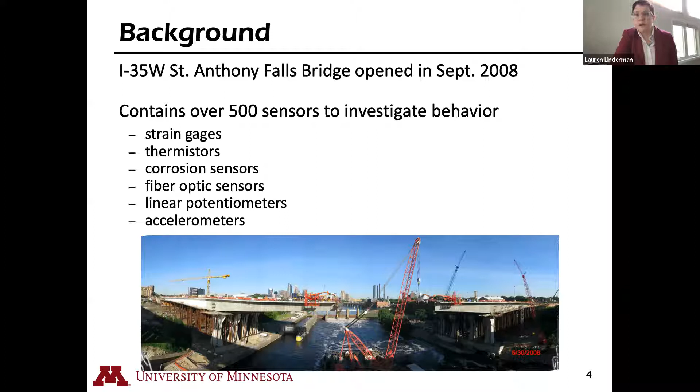The I-35W St. Anthony Falls Bridge opened in September 2008. As part of the bridge project, it was designated as a smart bridge, containing over 500 sensors used to investigate behavior, including strain gauges, temperature sensors, corrosion sensors, fiber optics for strain, linear potentiometers for evaluating displacements, and accelerometers. The goals of the instrumentation were to evaluate design assumptions, investigate structural characteristics and potential changes over time, as well as evaluate the effectiveness and appropriateness of the selected instrumentation.

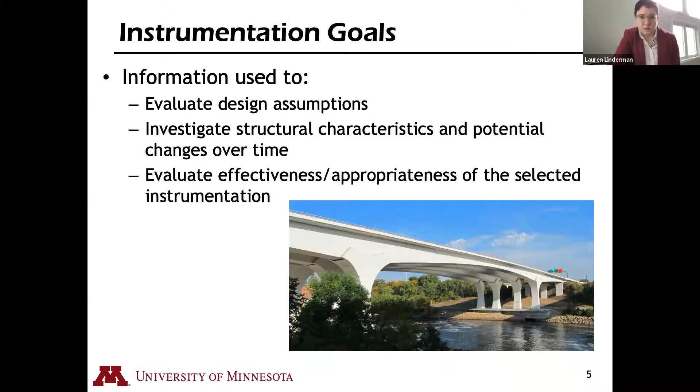A little bit about the bridge: there are actually two separate bridges, a northbound and a southbound, that are almost identical. Each has two boxes, with 3 continuous spans and an additional span. The continuous part is about 1,200 feet, with a 500 foot river span. They're post-tension concrete box girders, with each bridge consisting of 2 single cell boxes that are post-tensioned together to make up the section.

The main span was constructed using precast segments, while the other spans were constructed using cast-in-place on falsework. The cross-section is deeper towards the piers and gets narrower towards midspan. Most of what I'm going to discuss today is going to focus on the river span, and then also looking along the length over these first three spans.

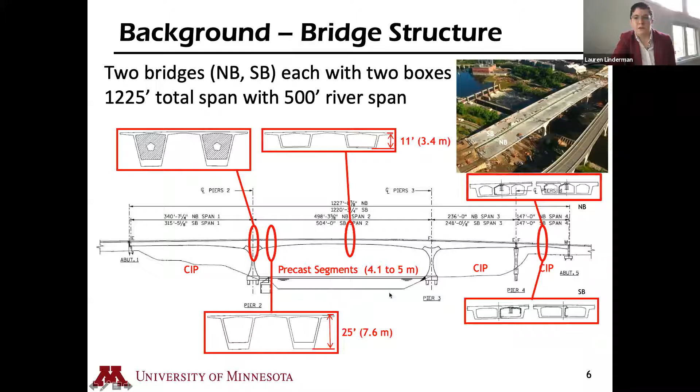There are additional thermistors at the midspan of the river span, and then fiber optic strain gauges placed along the length of the southbound structure. I'm going to discuss in a little more detail the vibrating wire strain gauges, the thermistors, the fiber optic sensors, and the LPs which measure displacement, because you'll see more information related to that data in the remainder of the talk.

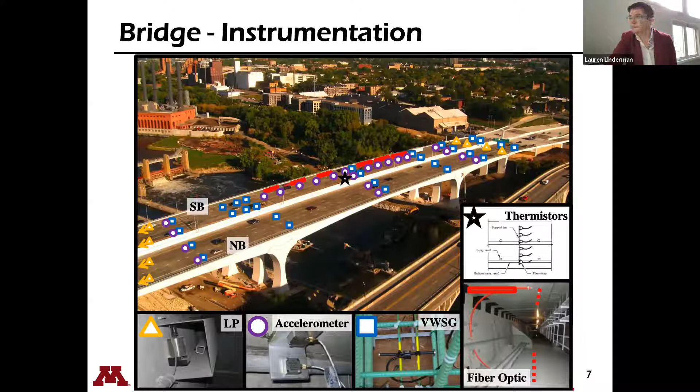There are 147 vibrating wire strain gauges used in the bridge superstructure: 112 in the southbound bridge and 35 in the northbound bridge. These are cast mostly within the concrete, approximately 6 inches long, and they measure local strain. They also include a thermistor, so they allow us to measure temperature as well. We use this sensor information to look at load distribution, shear and torsion, deformation, and curvature along the cross section. Typically these are placed through a cross section, so we can get a distribution of strain.

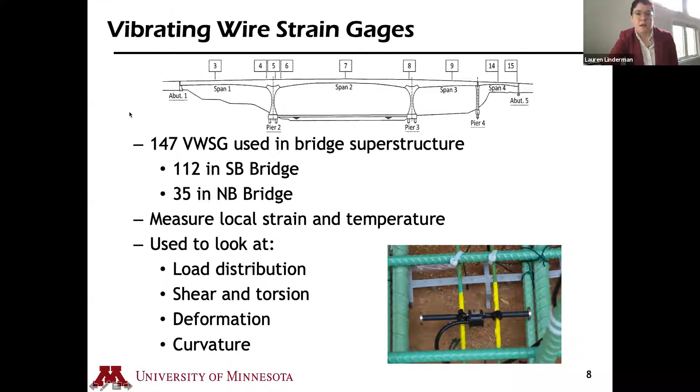What I've highlighted here are the key cross sections that are instrumented along the length of the bridge. In addition to the thermistors available in the vibrating wire strain gauges, there are 48 additional thermistors in the bridge superstructure, of which 42 are installed in the southbound bridge. These were used to supplement some of the data from the vibrating wire strain gauges.

Here I show one of the cross sections at mid-span of the southbound structure. There are vibrating wire strain gauges distributed along the depth, and then there's an additional set of thermistors, an array here, that are included to understand the distribution of temperature through the flange of the box. We used the additional temperature information to look at thermal gradients through the cross section.

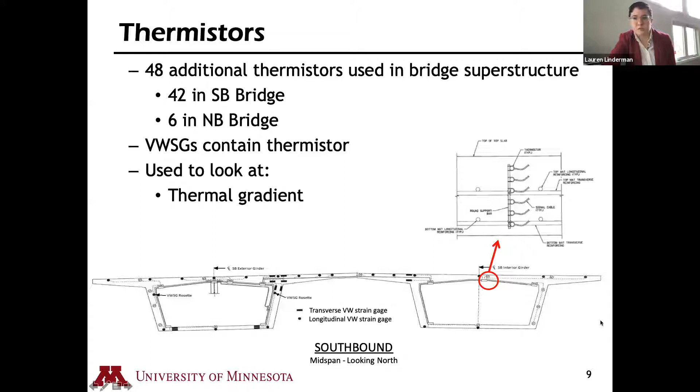Each box at the bridge expansion joints includes a linear potentiometer. This is used to measure the displacement of the expansion joint, or the overall longitudinal movement of the bridge. These are used for the majority of what we use for the long-term analysis to look at the overall global behavior of the structure.

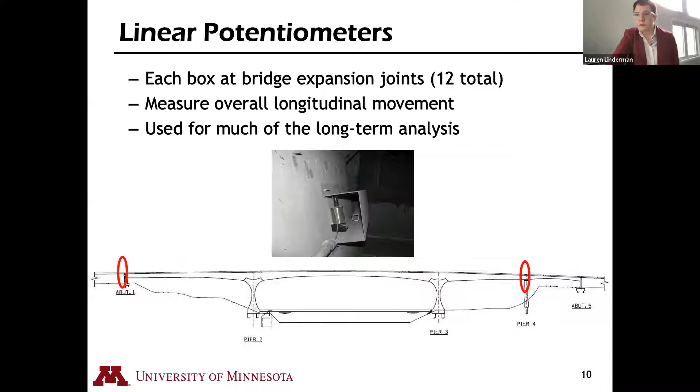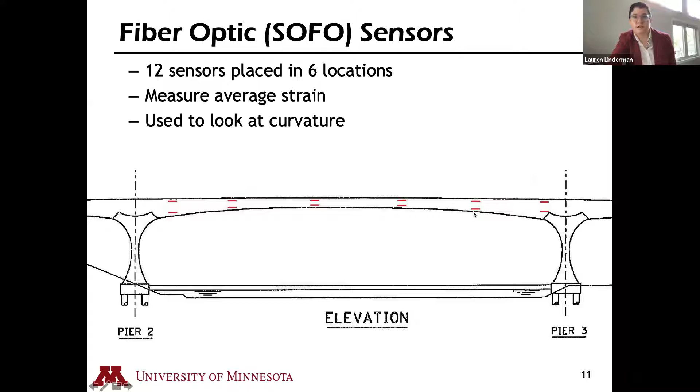And then finally, for the fiber optic sensors, these are strain gauges located in 6 sections of the river span. The sensors measure average strain, and they're about 13 feet long, so the strain is averaged over that distance, unlike the vibrating wire strain gauges that measure more local strain. So we have an average strain at the top and bottom of the cross section, and we use that to look at curvature.

Overall in the project, we found that the instrumentation survival rate is about 90%. This is significant given the duration, the number of sensors, and the embedment of a lot of these gauges. Some instrumentation performed better than others - we had to replace several of the linear potentiometers, and the corrosion sensing system never functioned. So that 90% is distributed on average, while some perform better than others.

The temperature sensing, the strain gauges, the linear potentiometers, and the accelerometers, as well as the SOFO systems, mainly were used to validate design assumptions, provide insight on the temperature and time-dependent behavior, and then also calibrate the FEM model that I'll discuss in a moment. Of particular interest, the temperature measurements and displacement measurements at the joints have been essential for long-term monitoring of the structure - these are the key measurements we've been building off of.

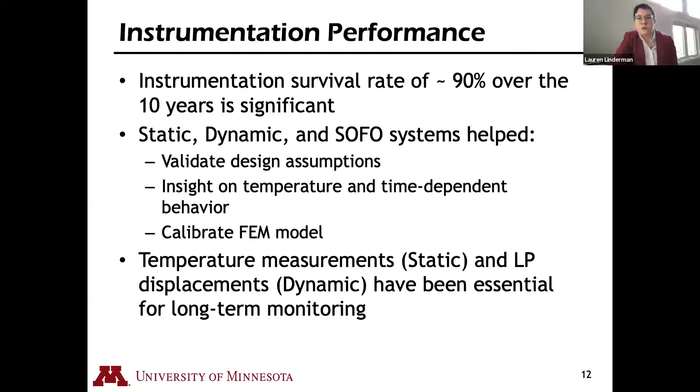So in general, with any monitoring system, the goal ideally would be to take our measurements and then be able to identify structural changes over time, to provide some insight of where to look or things that might be of concern. And that sounds pretty straightforward, but it's not.

So the idea is, how do I go from this really noisy data, or what we think is noise, to actually identifying what's changing with time? Data from individual sensors alone isn't going to be able to do that, because if I just had a sensor alone, then I just had this kind of bearing displacement data.

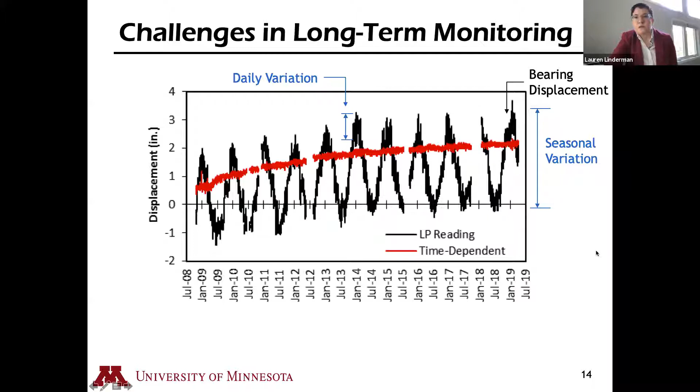Some of the challenges of doing this is that bridge behavior depends on a lot of complex phenomena. What we're trying to use is data from a group of sensors through a cross-section, particularly temperature in addition to mechanical measurements, in order to identify the actual baseline behavior that we're looking for.

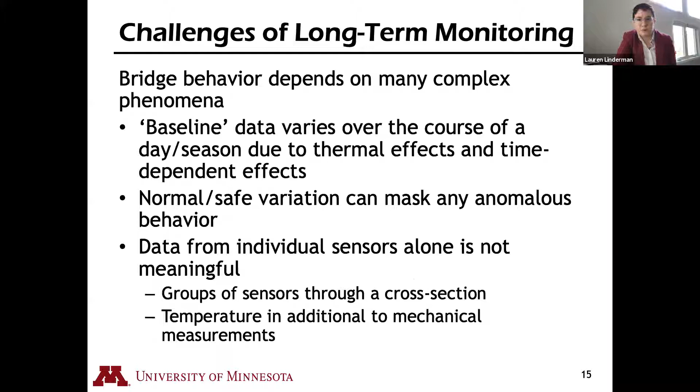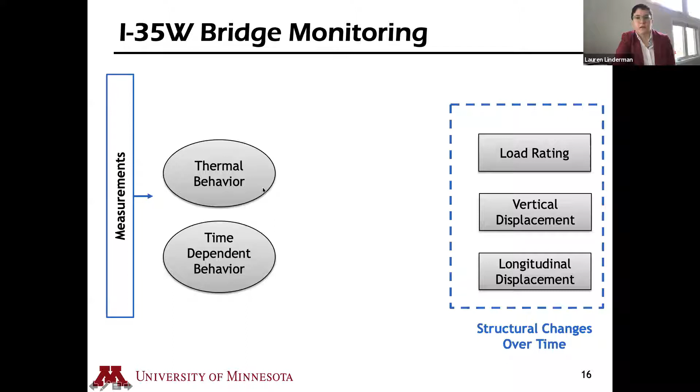So for this structure, we took the measurements and then looked at some of the key behaviors. We have both time-dependent behavior and thermal behavior that are going to be driving behavior of this structure, and combine that with an FEM model, which is informed by a dynamic model and some of our measurements, as well as information provided by truck tests, so that we can ultimately identify structural changes over time.

And what's interesting, or kind of nice too, is that these thermal behavior and time-dependent behavior analyses that we do help us evaluate some of the design assumptions that were used for constructing this bridge.

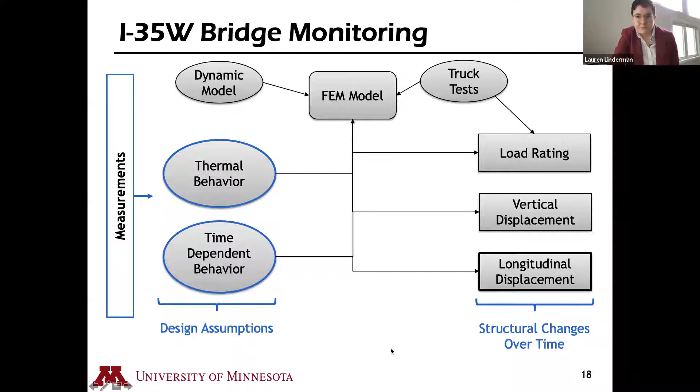So today I'm going to focus on the thermal behavior and the time-dependent behavior, and how that informs the longitudinal displacement. This uniquely large data set allows us to evaluate these design assumptions, and understanding these are essential to investigating structural characteristics and potential changes over time. This also allowed us to evaluate the effectiveness or appropriateness of the selected instrumentation.

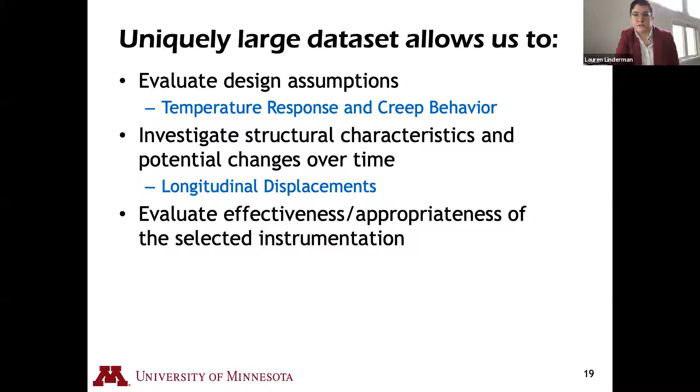So the first thing I'm going to touch on are the temperature response of the structure. And as you can imagine, in Minnesota, the temperature loading can be quite significant. So often when we think about temperature loading, what we're actually thinking about is thermal gradients - this is the temperature variation through the cross-section, and this is going to cause thermal stresses.

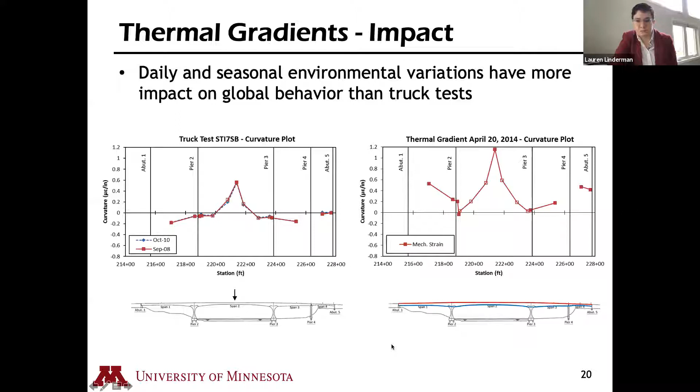So what we're going to look at is what are the shapes of these thermal gradients and how they compare to what we imagined for or proposed in design.

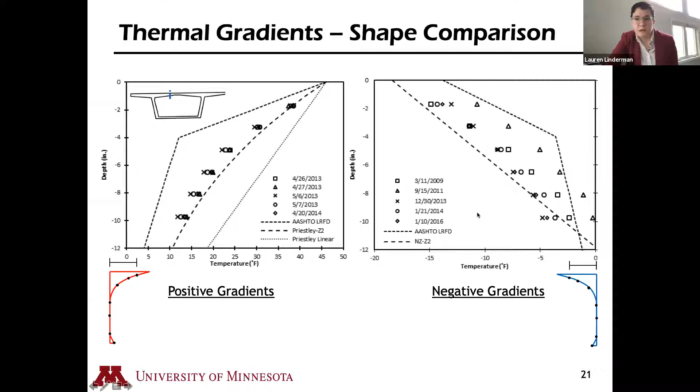So what you have here is the AASHTO design curve, these are the measured data points, and this dashed line is the Priestley New Zealand curve. On the right, you see the negative gradient profile. In both cases, the New Zealand curves, scaled to the region we're in, AASHTO Zone 2, better approximate the maximum measured thermal gradients than AASHTO. When we're worried about thermal gradients, we're interested in this area back here, and by aligning with it we get a larger thermal gradient magnitude. We see that in both the positive and negative gradients.

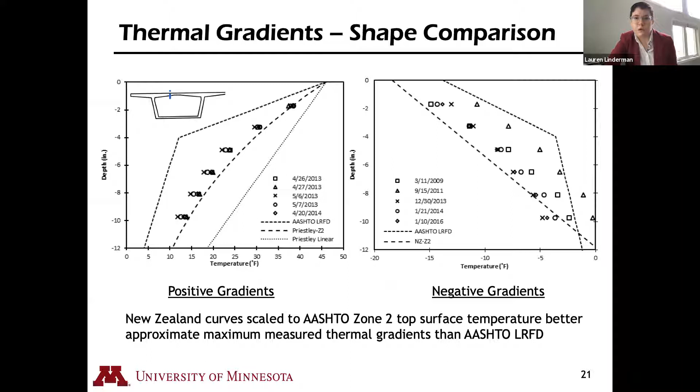So the gradients are larger, but what impact does that actually have? We looked at the induced stresses by applying these thermal gradients to the previously confirmed 2D finite element model to compare the effects of the thermal gradient. What you're seeing here are the stresses derived from that along the depth of the cross section, compared to the code. We found that the measured stresses were typically best matched on average by the Priestley New Zealand prediction, and this causes additional tensile stresses due to the gradient — about 80% larger at the bottom fiber due to the positive gradient, and for the top fiber, negative gradient, tensile stresses are about 30% larger. This could be significant for serviceability.

So what we're concerned about is if you have larger— sorry, distracted by the chat.

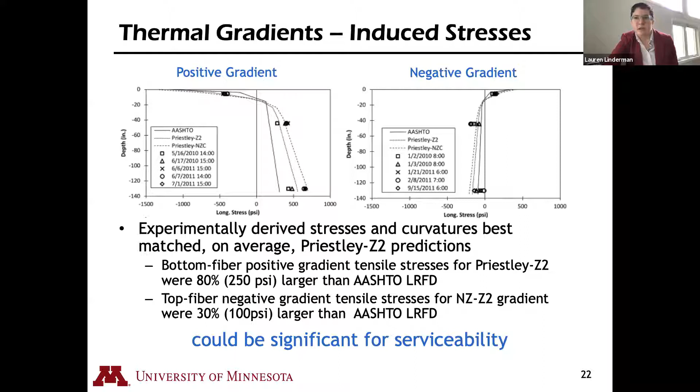If you have larger tensile stresses, you could get cracking or unanticipated cracking. So we see that it is possible that these large gradients could induce large stresses. But the question is, how often does this actually happen? I only showed 5 of the larger gradients — is this going to be a common occurrence?

So what we looked at were the measured positive gradient magnitudes compared to design gradient magnitudes. Here you see the measured gradients over time, and these two lines I've highlighted are the AASHTO LRFD magnitude and the Priestley New Zealand magnitude. What you'll notice, at least for the positive gradients, is that there's significant seasonal variation — larger positive gradients in the summer and smaller in the winter.

You see this when we look at just the number of days per month where we're exceeding the AASHTO design magnitude. We typically exceed the AASHTO LRFD design gradient on 33 days per year, so it's pretty consistent. And we only exceeded the Priestley design gradient 3 times over the 9-year period.

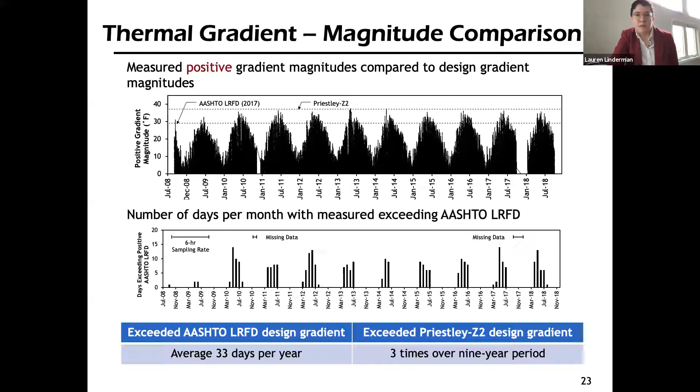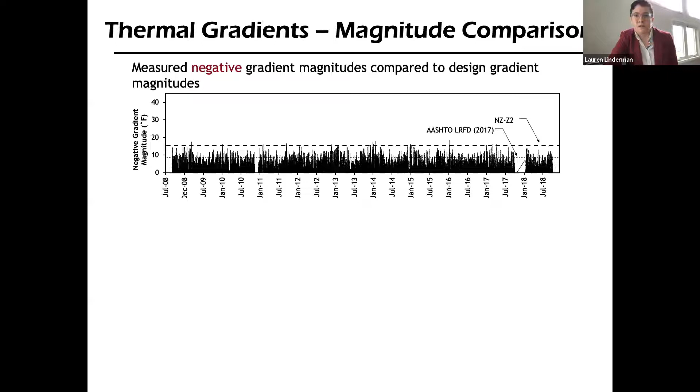We see a similar rate of exceedance when we look at negative gradient magnitudes, but these don't have the same seasonal dependence as the positive gradients. We tend to have large measured negative gradients throughout the year. What you'll notice is that we often exceed the AASHTO LRFD design gradient, and we actually exceed the New Zealand gradient less frequently. On average, we exceed the AASHTO LRFD design gradient about 54 days per year, and we exceed the New Zealand design gradient on average 2 days a year.

One interesting thing is that we have these thermal gradient stresses, but that's usually not the only thing on the bridge. So how does this actually impact our service load stresses, or what we might consider for design? We looked at the impact of the gradients on these service load stresses, where our concern is cracking rather than strength.

Here I have the relevant service load combinations from AASHTO LRFD. We have some combination of dead load plus post-tensioning plus creep and shrinkage. The difference in the combinations is how they combine live load and thermal gradients—you can have some live load on the structure with some variation on the thermal gradient, and Service 1 or 3 would be no live load with full thermal gradient.

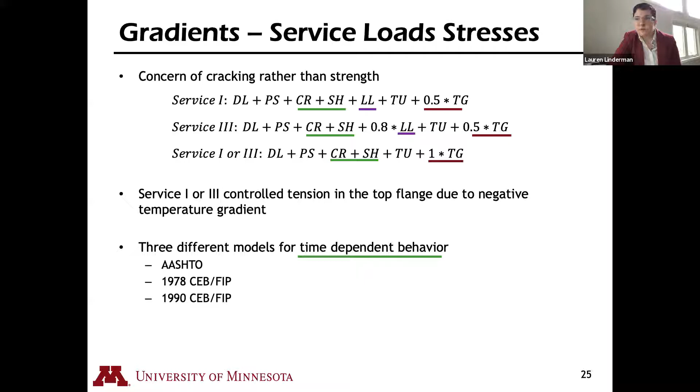We combined the top flange tensile stresses—the stresses through the cross-section due to dead load, post-tensioning, creep and shrinkage, additional stresses due to live load, uniform temperature, and thermal gradient, to get a total stress. In the table below is just the top flange, the upper red line under negative gradient at midspan, compared to the MnDOT tensile limit, which enforces that the top of the deck should still be in compression due to post-tensioning to limit potential cracking.

We looked at different creep models—this structure was actually designed for CEB 1978—and different temperature gradients that could be used. What we're interested in is this total number. If you had CEB 1978 and designed for AASHTO, you'd expect about 500 psi in compression, which is significantly lower than your tensile limit. But what might actually be happening on the bridge is closer to CEB 1990, or the measured gradient or New Zealand, closer to what we're actually seeing in the structure, and if that's the case, you're getting about 300 psi in compression.

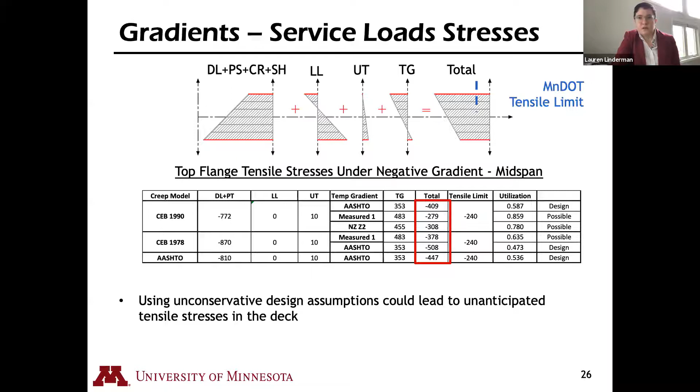The next thing I want to touch on is time-dependent deformation. There are conflicting time-dependent models that predict disparate displacements due to creep and shrinkage. The I-35 data set allowed for measured time-dependent deflections and strains to be determined, which we could compare with existing models under realistic volume-to-surface ratios and temperature histories. This was of interest because long-term creep and shrinkage could potentially lead to post-tensioning losses.

What we're showing here is an example of different creep and shrinkage models. You have an applied load, you get your initial elastic strain, and then that will creep. There are 2 main types of models, logarithmic models and asymptotic models, which have slightly different asymptotes and different rates.

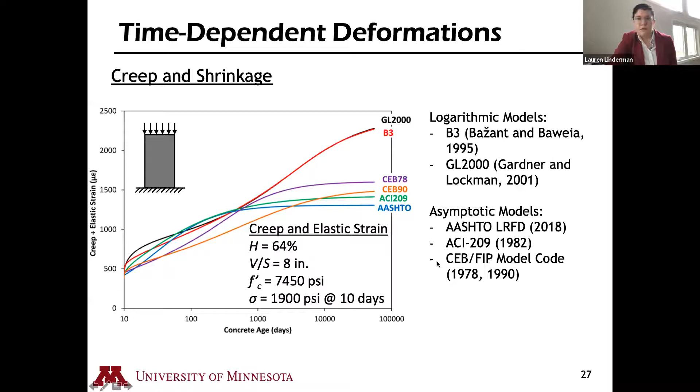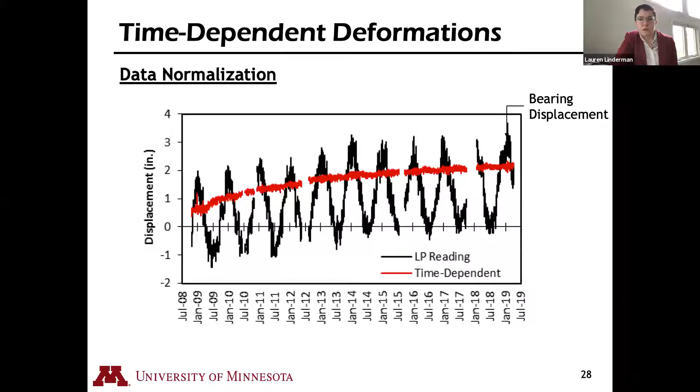In order to identify the time-dependent deformations, we need to take data that looks something like this, where we have the temperature variation, and then look at what we ultimately want to see, which is the time-dependent deformation here in red. So to do that, we're going to use some data normalization techniques, and the first part of that is to extract the temperature effects.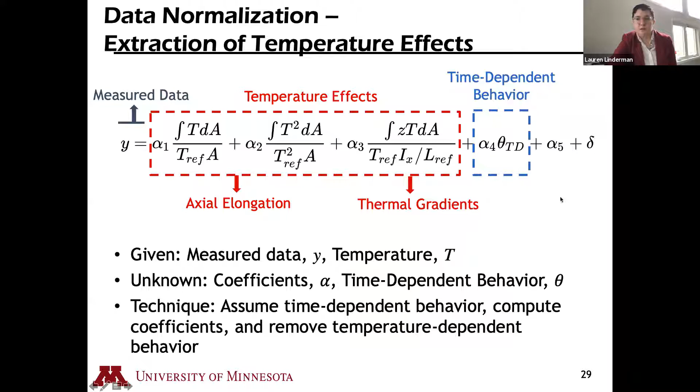There's usually some remaining temperature effects that may not be modeled, showing up as error residual. So what we get out is what's on the left. You have your data normalization adjusted for temperature, compared to actual time. And what you'll notice is that creep is going to increase when it's warm and slow down when it's cool.

So you get temperature dependent rates of concrete aging, creep, and shrinkage. If we want to compare these to any model results, we're going to compare them to a model that's computed at a constant temperature. So in order to make these comparisons, we use an adjusted age, pulling everything back to the same constant reference temperature to account for this increase when warm and slow down when cool. This allows us for comparison with creep and shrinkage predictions, so we can get a better idea of what model is most effective.

So you go from something like this to looking at the time-dependent behavior as a function of adjusted age. What you see here is the bearing displacements on the northbound structure at the two different joints, and then total time-dependent behavior of the entire three spans.

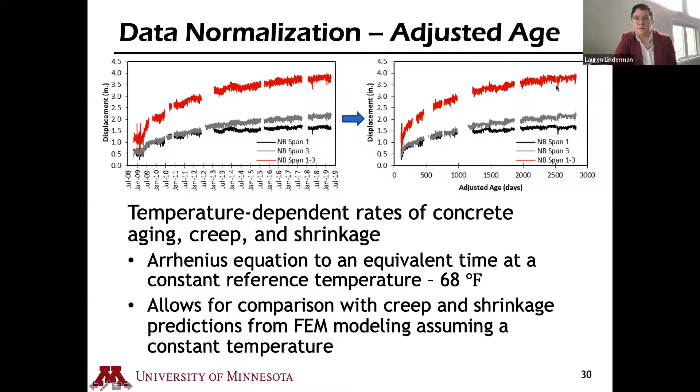We took that time-dependent behavior and compared it with FEM predictions. What I'm showing here is the displacements measured at Pier 4. A positive longitudinal deflection actually corresponds to the bridge shortening. We're looking at the measured data here versus different models over adjusted age.

We're still kind of early in the life of the structure, but as you can see if I zoom in, the bridge is creeping and it's starting to slow down. We can compare that with models applied to the FEM predictions.

What we notice is that the CEB-FIP 1990 offers a conservative assumption of the behavior, and we're getting more creep and shrinkage than would be anticipated by ACI 209 or AASHTO. So in general, we found that CEB 1990 and ACI 209 offered the best approximation of the time-dependent behavior in the structure.

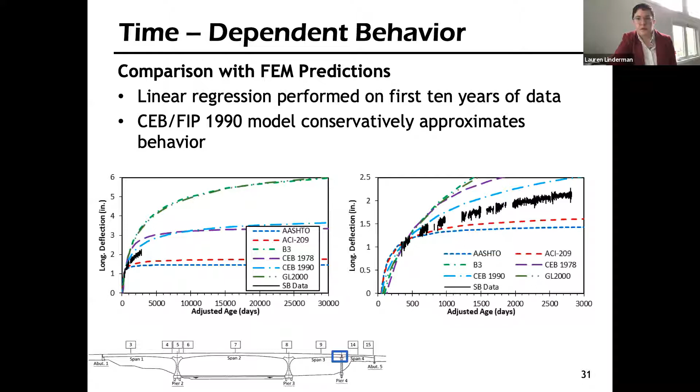This longitudinal deflection was ultimately used to look at the long-term performance as part of our monitoring project, where we've computed both a short-term check and a long-term check to detect anomalies. The first is to just look at short-term changes, something like a bearing lockup, and the second was to look at how overall the time-dependent behavior might be changing.

For that, we looked at the slope of the time-dependent behavior, and it should always be decreasing and positive. So the bridge should always be shrinking.

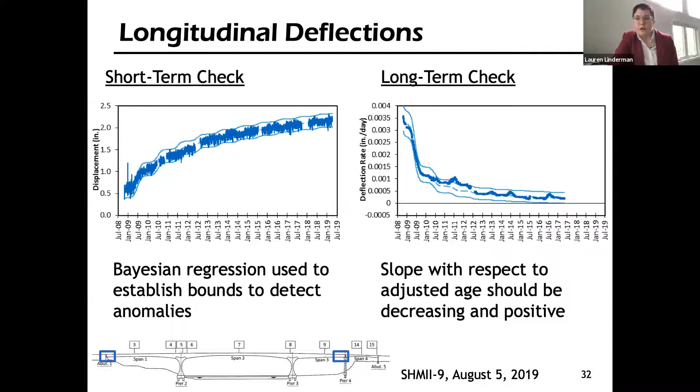So what lessons did we learn from this? The key one, I think, is that environmental factors are essential to interpreting structural behavior. As a result, we would propose that you want more than one heavily instrumented cross-section. This would allow you to capture temperature distribution throughout the structure as the cross-section changes. So instead of having a very heavily instrumented single cross-section, have more cross-sections with a better distribution of sensors.

This long-term data set also allows us to isolate normal variations, and these normal variations actually help us evaluate design assumptions. We did find that one thing to be aware of is that there are challenges when accounting for system outages when looking at long-term behavior. So how do you connect disparate data if you have an outage over a period of time?

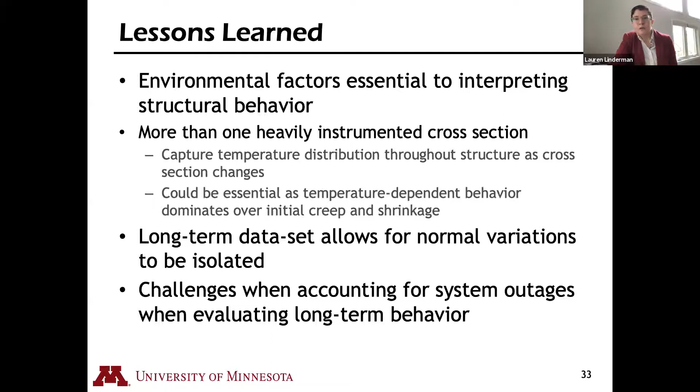And then more directly related to instrumentation and how you would deploy the system, our belief is that experts should be present during the installation of sensors along with the construction team to collect data at appropriate times, and also document the exact location and orientation, which improves interpretation of the results.

Also, it's key to protect sensors, wiring, and labeling during construction so that you don't lose any sensors in the process. When doing your system design, think about robustness to component failure—if you lose some component, is the entire system going to be down? How are you robust to things like electronics outages due to lightning strikes? And finally, evaluate the sensitivity of the sensors when you select them to make sure you're actually obtaining the behaviors of interest in the system.

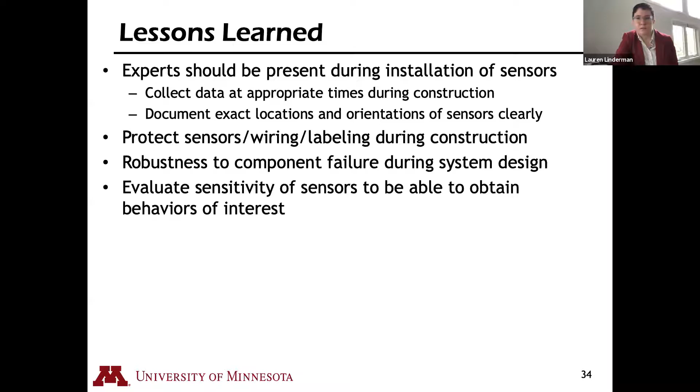So I want to thank you for your time today. That was kind of a lot. Again, I want to acknowledge the collaborators on this project—this is not my work alone, and I think Carol has been helping to answer some of these questions. This work has been included in a few different reports, and there's the most recent report related to the 10-year review. So thank you again.

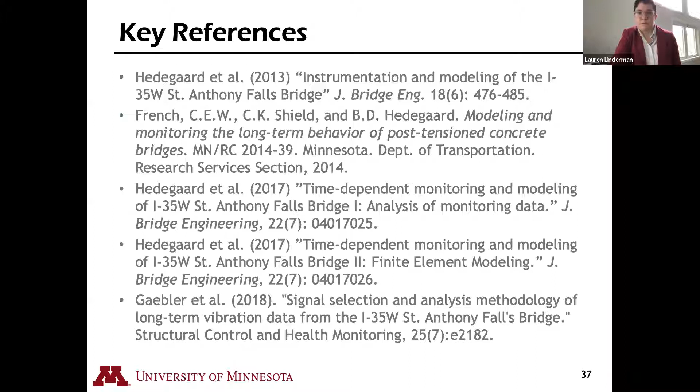Well, thank you, Lauren. A great presentation, and thank you for your lessons learned that answered some questions that I personally was going to put in the chat. And speaking of, Christy, are there any questions that are appropriate for Dr. Linderman to address at this point, or should we be moving on?

There's a few questions we can touch on. I know they're written in the chat and Carol did provide some responses, but it might be nice to hear those responses out loud as well.

So there was an initial question about how many trucks were involved in the measurement of truck-induced stresses and strains. It sounds like there were 8 fully loaded sand trucks. I'm curious, do you guys have the approximate weight of each truck? I don't know that off the top of my head. I don't know if Carol does. I think they're about 50,000 pounds.

Okay, each. So then there was a supplemental question: what is the impact of increasing the number of trucks on the reported stresses and strains? It should be linear. The 8 trucks we moved throughout locations on the bridge, and what I was presenting was just one instance where they were as close as possible together at mid-span of the river span. As Carol pointed out, this live load is going to be larger than you would ever locally have in the design loads.